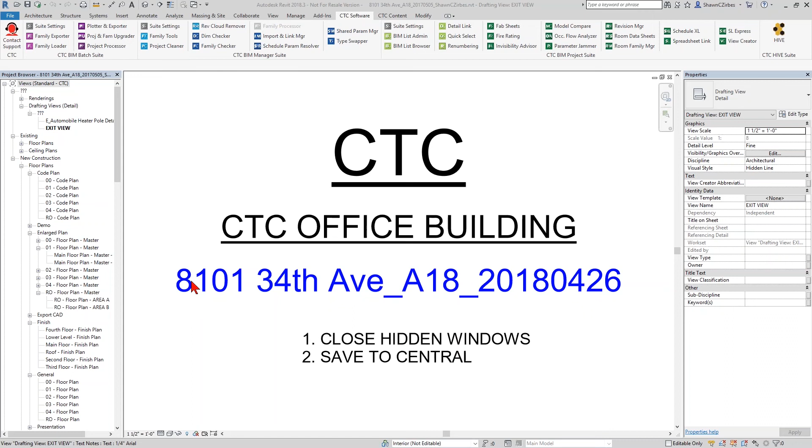So without much more Death by PowerPoint, let's go directly to Revit and talk about this tool live. I've got a building open here. And if I go to any one floor plan in my building, it's very likely that someplace I'll see some dimensions. Fantastic. I can see dimensions and probably they're right. I don't know for sure, but they're probably right.

And what I was mentioning earlier is that if you click on the value for a dimension, you can actually replace it with something. Like maybe you want it to say typical. Great. See structure. Coordinate with blah, blah, blah. Doesn't matter. You can put those things in all day long. And that's not really a problem, though I do sometimes like to know where they manifest so I can respond to those if it's my responsibility.

But if somebody was to type in something like 8 foot space dash space 0 inches, if I click OK here, Revit actually tells me that looks like a dimension, and you shouldn't be doing that. So no, it's not going to let you do it. But again, there's dirty tricks that can be used to make this happen. When it happens, it's really difficult to find because it looks the same as what's going on out here, or there's other ways of controlling that.

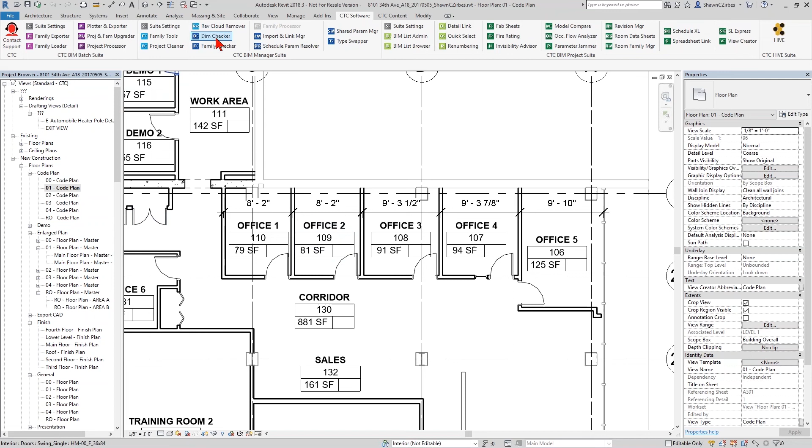So the Dim Checker tool here will allow me to look through my model for any dimension whose value has been replaced with text. I can choose to actually show dimensions' actual values as well, so basically show me every dimension string. But to me, that's a little bit less meaningful. I don't typically care about dimensions that are accurate. I care about using this tool to find dimensions that are potentially lying to me.

And I'm trying to exclude things like typical, maybe, and see so-and-so. Maybe I want to exclude those from the results. That way I'm only really getting things that I'm not expecting to see at different points in the model.

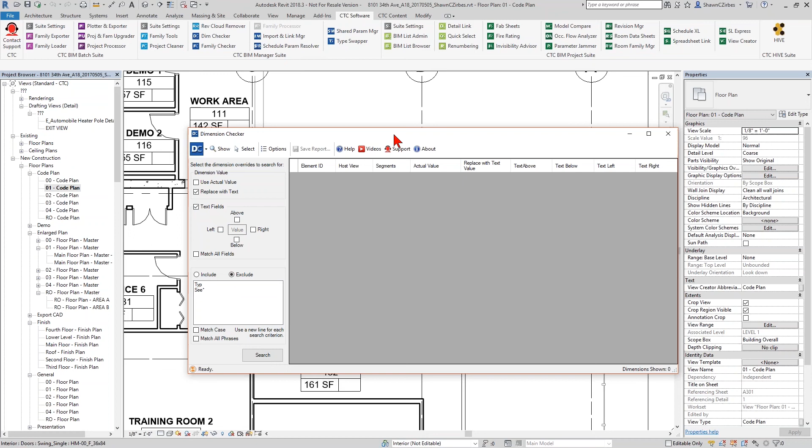If you care to do so, you can actually use the text fields as well and see things when people put text above or below, left or right of that value. That's another thing that you can do when you're overriding the dimensions here in the model: you can put text above, prefix it, below, and suffix it. And so you can actually discover those things as well. I don't care about those right now. I care about the replace with text. That's what I'm looking for.

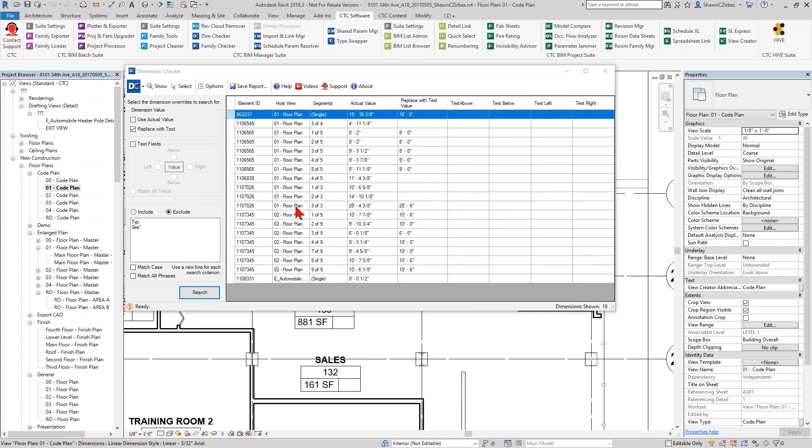And so when I hit search, this is going to run through my model and find me all of the dimension strings where the actual value and the replace with text is not typical and not see so-and-so, and the replace with text value is actually overridden. And it actually tells me exactly which view these dimensions exist in, because dimensions are very view specific. They're an annotation. They can only exist in a single view at any given time. One exception, of course, is dependent views, but this will list the master view if it finds it.

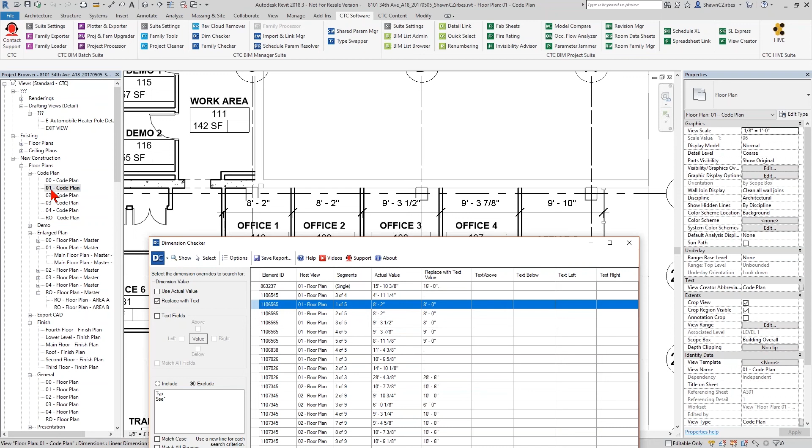So when I'm looking for these, I want to go figure out where this is. In fact, this dimension string here, 8'2", 8'2", 9'3½", and so on down the list, actually looks a whole lot like this dimension string up here. So maybe I want to figure out exactly where this is. Well, it looks like it says it's in the 01 floor plan. It's the first of 5 segments, and in fact, all 5 have been overridden at some point. Let's go find this. If I click on this and tell it to show me, right now I'm in the 01 code plan. This is the 01 floor plan.

When I click show, it'll actually open up that view and zoom me in, centered on my screen where this is. And if I wasn't sure exactly where it was, I could hit select, and it'll highlight the dimension for me. So I can start to identify what's going on here, and I can see the first of the 5 segments is supposed to be 8'2", and it's been overridden with 8'0". So I can click into here and say, oh yeah, in fact, that's the case. And if I wanted to now, I could force this to use the actual value and get rid of that overridden property. So I have the ability to interact with the model and actually execute on repairs if it's my responsibility to do so. In a lot of cases, it's not.

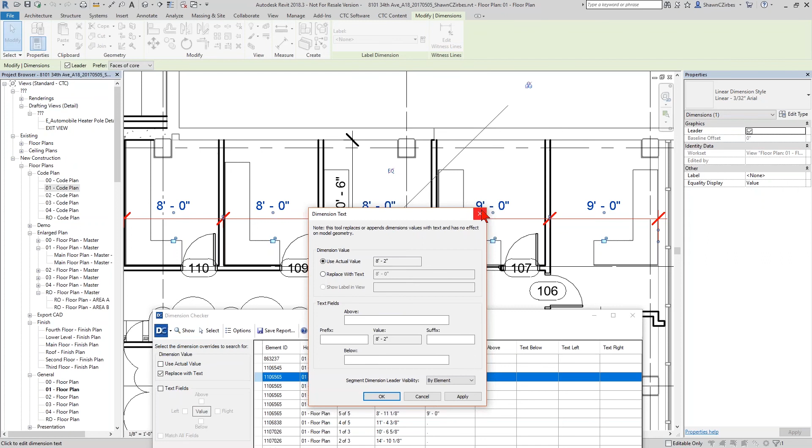In a lot of cases, I'm reviewing a model that I got from some outside source. Or maybe I'm a BIM manager doing an overview of a model, reviewing it and giving a report back to a team, or a person running some QA or QC on a project and checking to see what's going on. I might want to run this tool, and then I'm not necessarily responsible for fixing it. I'm going to hand a series of red lines back or give them this report, because I can save this report out and give it to them.

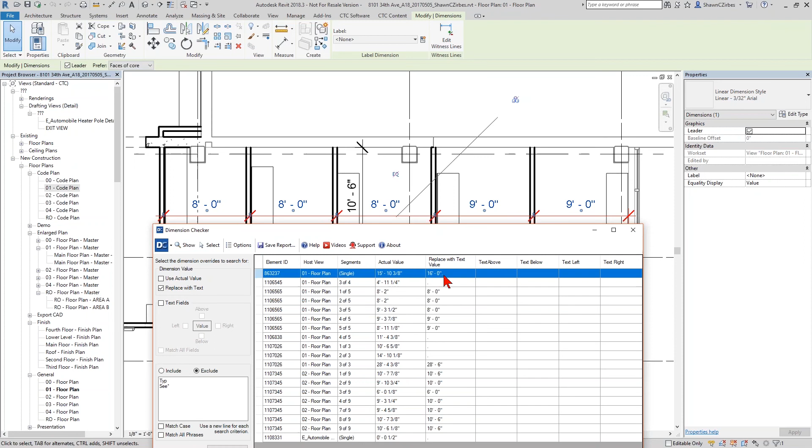And again, there's a lot of dirty ways that this can happen. Like right here, 16'0" dot. There's a little dot there, and it might be difficult to see. In fact, being an ex-contractor, if I saw this printed on a sheet of paper, I could care less about a spec that's on my document set.

I'm going to build this 16-foot, center to center in this case, or face to face, whatever the case may be, because that's what I'm told to do, and I'm never supposed to scale off drawings, even though the actual dimension, the actual physical space is 15'10" and some change. Maybe this person didn't know how to properly round up or down, which I shouldn't be doing anyway, or properly coordinating the actual space. That could cause some discrepancies in this model, depending on which way this went.

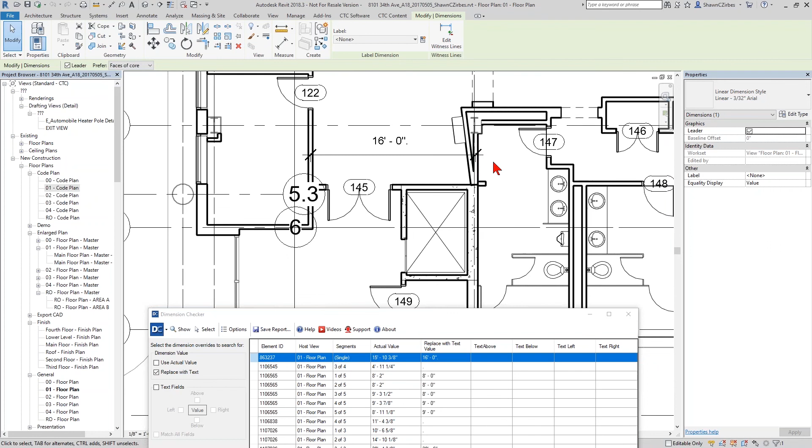If I built off of this wall and went and continued on that way, this isn't going to line up properly in these areas. And then maybe the restroom is too small, or something else squirrely might happen. So you might want to make sure you're able to discover these types of things.

This one here is actually one of my least favorite methods of overriding dimensions. If I show this one to you, let's go discover where this is here. Let's select this string. Okay, it's this string right here. And the string that's actually a problem is this guy, right here. At some point in time, the spacing between these two must have been 5 feet. Now, looking at this model, clearly, if this is 11 feet, this cannot be 5 feet.

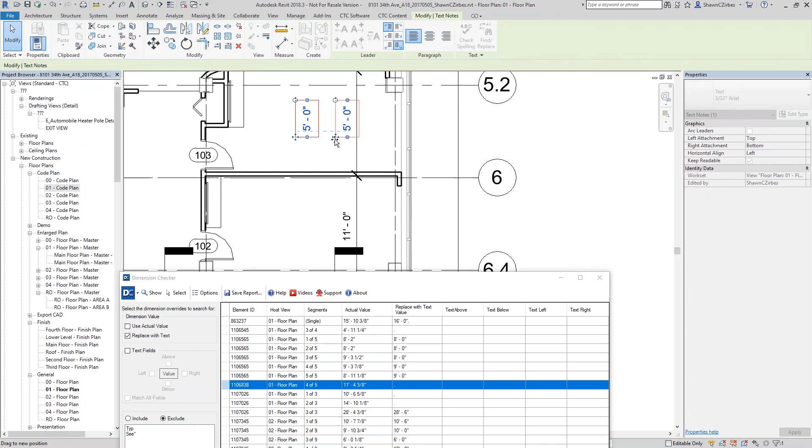But somebody overrode some value with a piece of text that in no way updates with the model, and they put a dot for the dimension string, and they put some opaque text over it, right? Try and discover that yourself. Try and discover all these issues in a model when that might be there. Now, somebody might visually pick up on this during the QC process, but if I can just very rapidly run a report and understand exactly where that particular problem happens to be, that might be meaningful.

So that's the dimension checker. It's not a big tool. There's not a lot to it. But what it does do is it gives you information that allows you the ability to understand exactly where dimensions may be overridden and what the ramifications might be, discovering exactly where they are in the model, and even saving out an Excel report to an Excel file to hand off to the team members.

One of the things that is included, by the way, is the element ID. So if you give this to team members, they can actually use Manage, where is it at here, Selection, Inquiry, Select by ID, and they can select the dimension string themselves in their own project if they did not have the dimension checker tool handy to them.

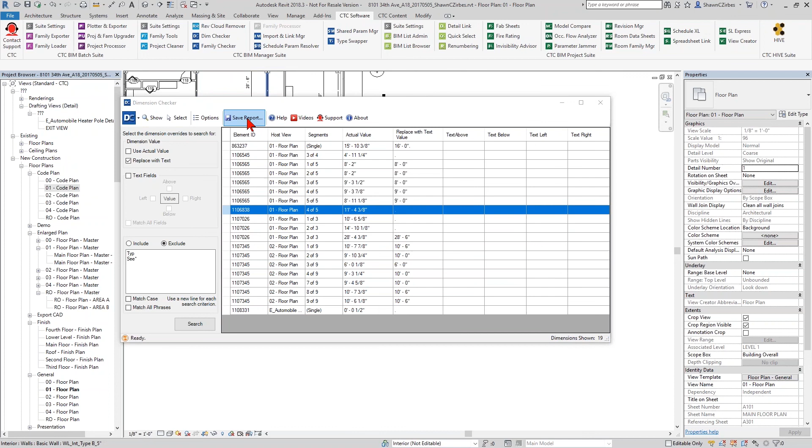Because this is a BIM Manager Suite tool, and I don't necessarily hand this tool out to everybody. So this is a tool that you will have to have a BIM Manager Suite license for. It is a paid-for tool, but once you have that, you can run these reports and you can even save them out and hand those Excel spreadsheets off to any team member that you want.